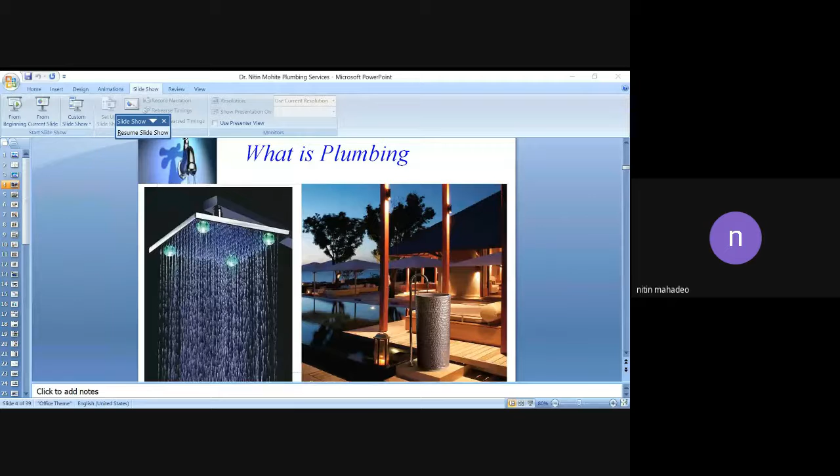Sorry to disturb, slides are not moving. Yes, now it is moving. Can you make it entire screen? If I make it entire screen, once I change the slide, it is not visible to the audience, I think. Is it visible now? Now visible, sir, is it changing the slides? Not now, sir. Sir, it needs to be made into PDF. Is it a Word file? If it is made PDF, it will scroll easily. No sir, it is PPT. I think it is in PPT mode, so if you do it in PDF it will easily move up and down, scroll. Sometimes some laptops do not support that scrolling. Maybe if you can convert it to PDF and once again open it, that will be useful. But now the next slide has come.

I'll keep it this way so that people are able to see the slides, and I can also move my slides, right? Okay, continue. Recently I also visited many hospitals.

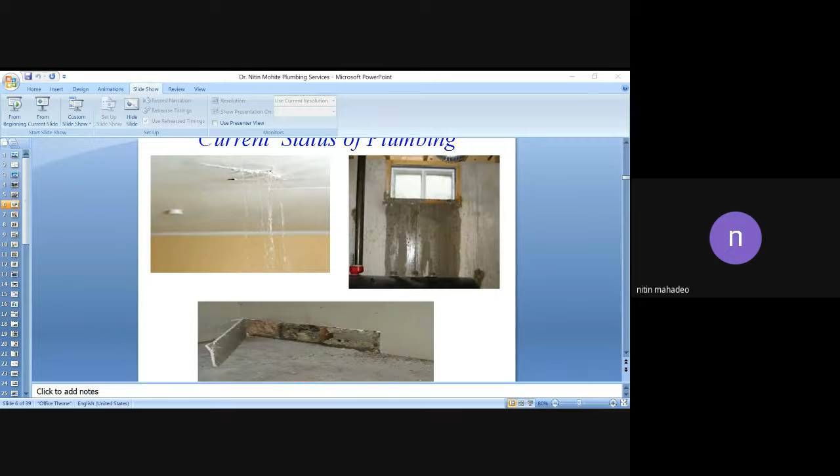But what exactly is the current situation? If you see carefully... is it visible now? Yes sir. So see, in most buildings, water starts leaking from the top floor, whether you are staying on the second floor or third floor, and this is the basic cause of fighting and creating unhealthy situations in most apartments.

Next, if you see carefully, water starts leaking from the air conditioning and the entire wall is wet. If you see the government buildings, if you move to the back side of the building, you have a hanging garden because the wall is wet and the entire green portion is covered. Because of this, where the wall of a bathroom and kitchen is shared, on the bottom side you will see fungus-like situations. Dampness is there, which creates unhealthy, unhygienic situations in the kitchen, directly affecting your health.

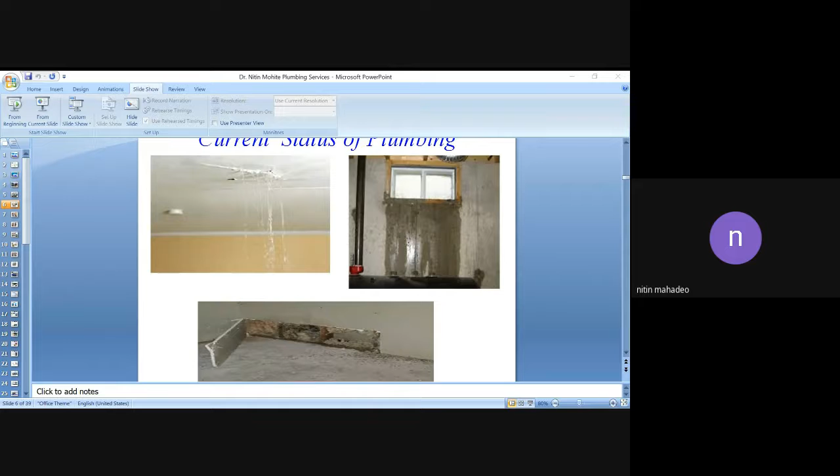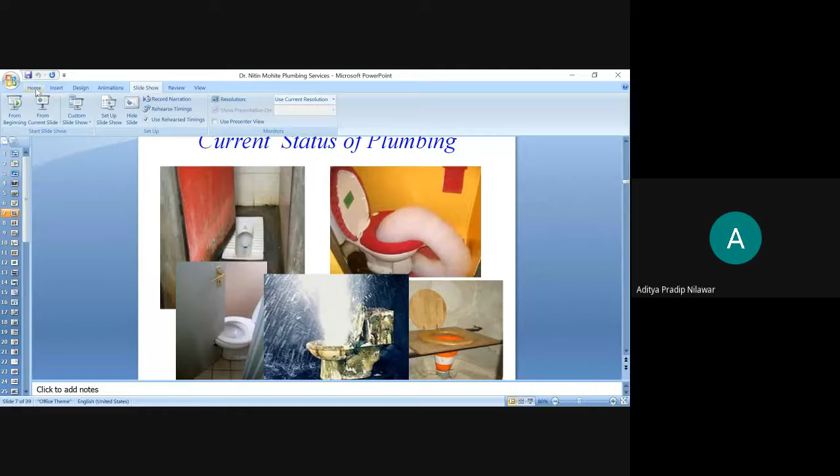Sir, the slide is again not moving. Can you make it a slideshow, sir? Yes sir, that one. Customize slideshow, sir, can you make it? Okay. No, it's not working, sir. Setup slideshow, sir, setup slideshow.

Is it okay now? Sir, it is coming, but after some time it is not moving up and down.

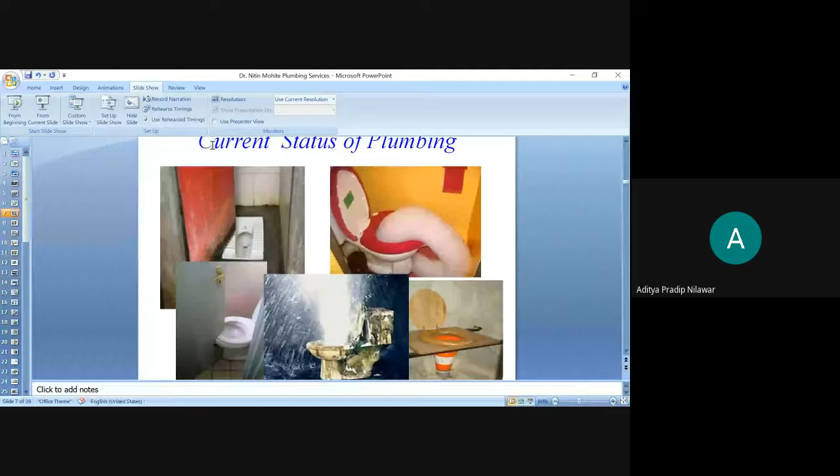Okay sir, meanwhile he can continue. Ask him to send this file by mail to you, and you convert it to PDF. It will take a couple of minutes. Okay sir, send it back. Can you share this slide?

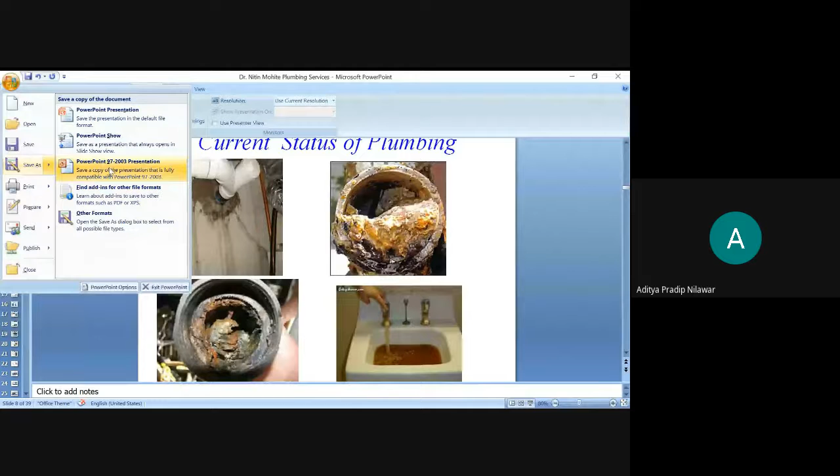If you do this, then go to save as other format, last option, other format.

Or you can print, sir, no problem.

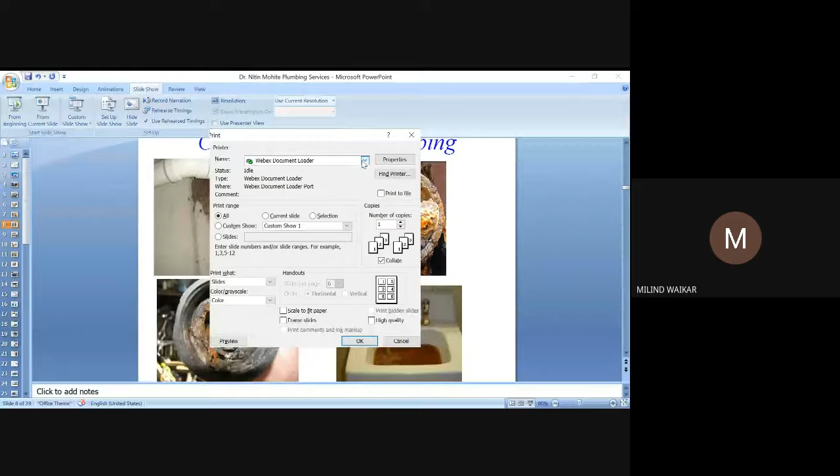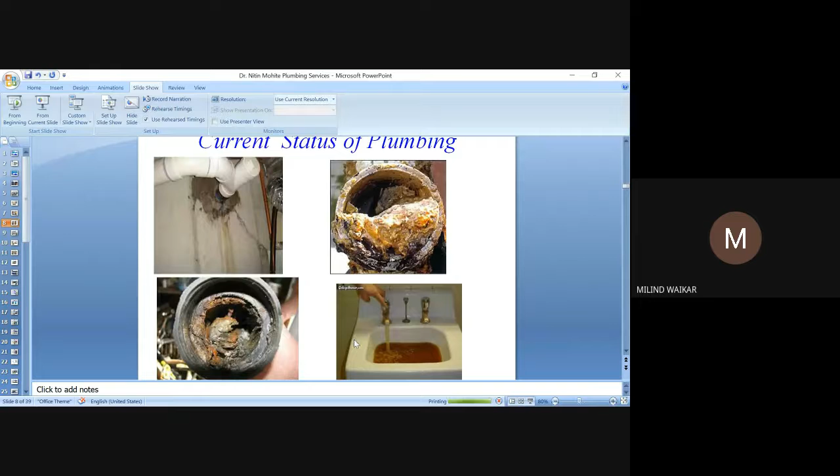Participants, please stand by. Okay, very interesting topic going on.

If anybody is having any other solution, please post it on message so that Aditya can just get track of it.

Sir, what happens once I convert this into a PDF? The slide changing option is not working. No need, sir, the slide changing option just scrolls down the PDF.

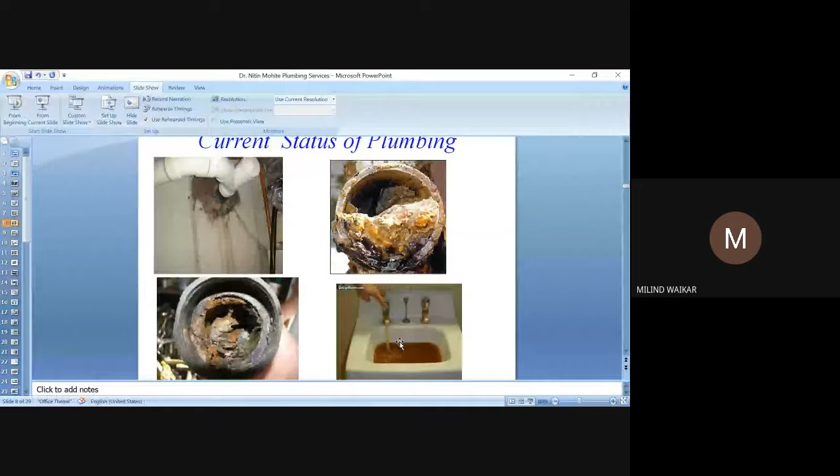It will automatically come down. You open it and it will come down on its own.

Open as PDF. Sir, first you have to stop the presenting, then you have to make it.

If the size is bigger, sometimes it doesn't convert. No, actually sir, in one slide I have an option of animation.

Okay, and videos are also there at that time, so you keep it open, sir.

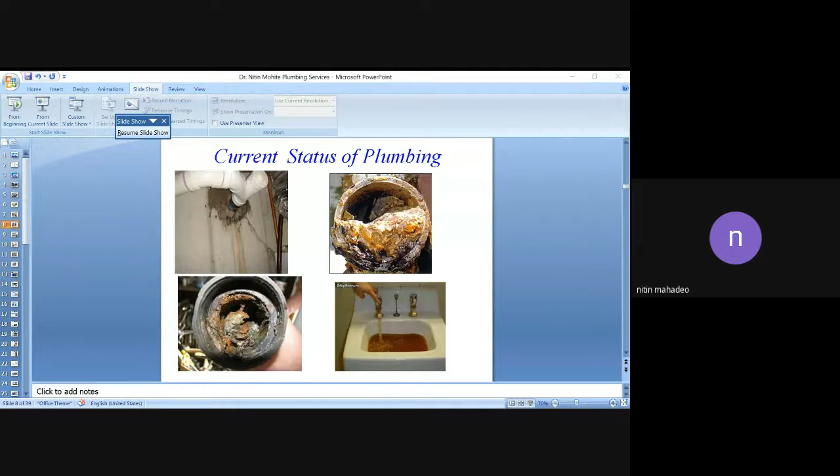Another point is that the water supply pipes which are to be used - generally we use galvanized iron pipes. And see here, more than 50% diameter is reduced. How are you expecting a desired pressure and volume of water coming out from this pipe?

And if you are not having a proper water distribution system with proper pipes, see, Coca-Cola like water is coming from your basin.

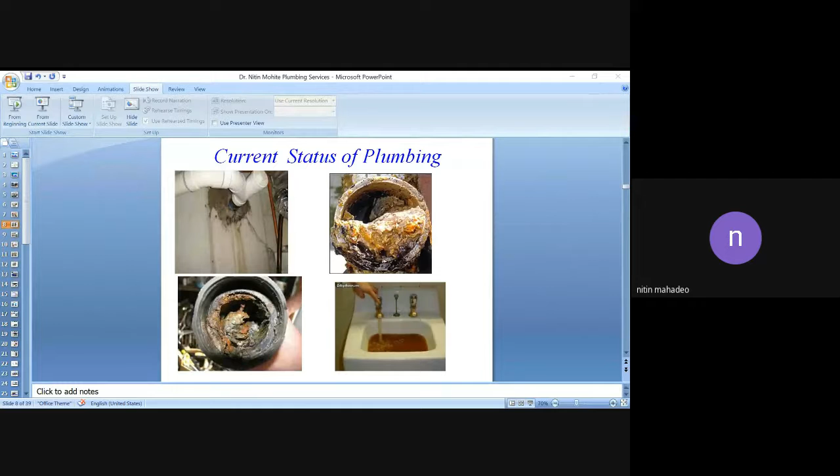That is why it is very, very important to know which type of piping material we are going to use. And if you are not using a proper piping system, the same is coming into your basin.

People are doing adjustments. See how the supports are there for the basin.

Two taps are there, and it is giving support by using some towel or muffler which is supported to this basin. People don't know what kind of technical specifications we need to install, and how the hygienic condition is to be maintained. Urinal is there, closely wash basin is there, having two taps. On the left hand side, there is hot water, and on right hand side, there is cold water system.

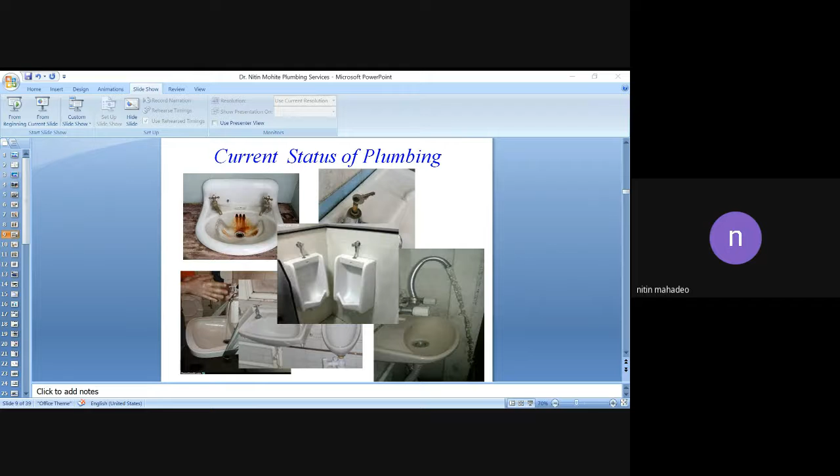This is another issue. See, this is a rented flat. The owner says if there is no faucet available, please go into the market and purchase it, I will reimburse it. The owner is a student, so he goes and purchases a fancy type of wash basin faucet. See the trajectory of water coming out from this, it is nowhere close to the basin.

And that is why in European countries, unless you show an ID card proving you are a certified plumber, you will not get even a single nut or bolt. All plumbing activities are carried out under the supervision of a certified plumber, and later the authority engineer comes and checks all these things. This is the methodology used in European countries.

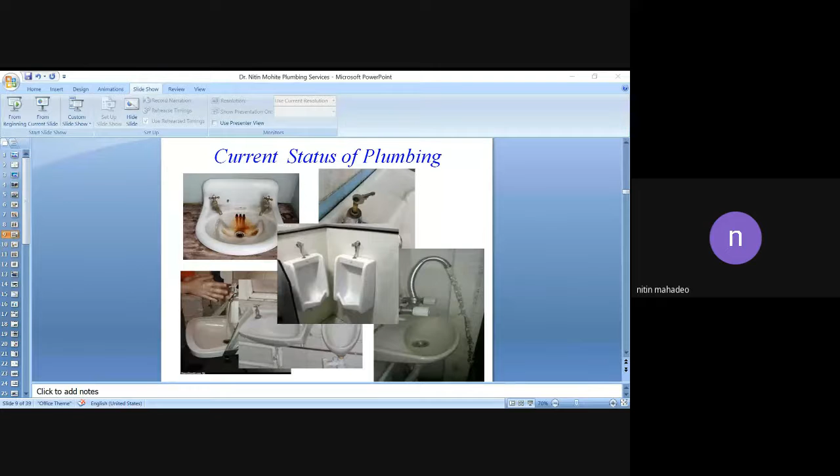Sir, in slides you are not moving, sir. Sir, can we? Is it visible now? Yes, sir. So we have a dual piping system.

Okay, so the water which is coming out from your WC and kitchen is called black water. And the water which is coming out from your basin and bathroom is called gray water.

It is mandatory nowadays for corporations. Within one or two years down the line, they are in discussion with COEP. Have a separate pipe for the gray water. We can treat this gray water and reuse it for flushing. And this first pilot project is already there in the COEP hostel, in association with the Department of Science and Technology.

We have a separate system. We treat this water, reuse it for flushing, reuse it for gardening purposes. And it is mandatory to have a dual piping system.

Solar system is again an issue. We have solar panels on your society's top, but when you wake up early in the morning, say 5 o'clock, if you open the hot water tap, you have to empty 2-3 buckets before the hot water starts coming. So you empty the bucket, and it is a loss of water.

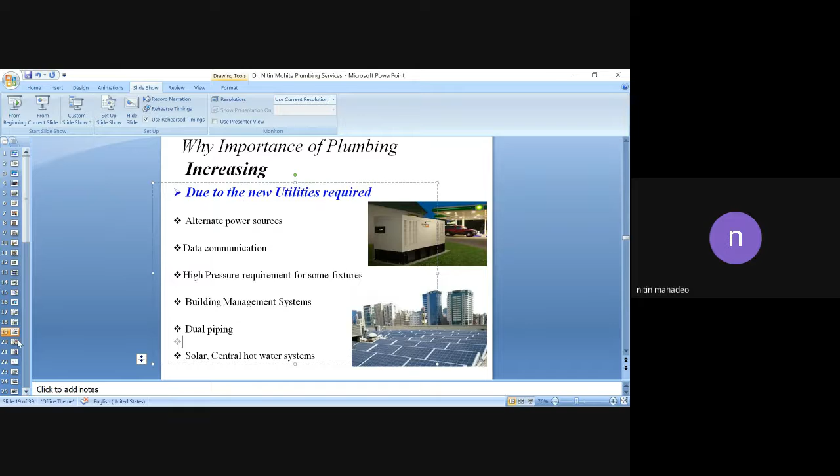Second important thing is the fire systems. It is mandatory to have fire systems.

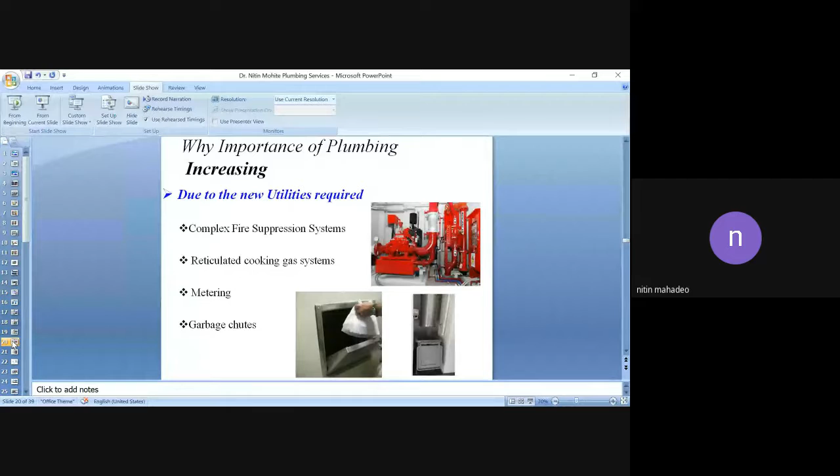So if you use a good system, the health aspect of plumbing plays an important role. If you use a good plumbing system, it ensures good public health. There is saving of water, saving of energy also, and eco-friendly designs are there. How these savings of water and eco-friendly designs work, I'll discuss later on by using technological solutions for high-rise buildings.

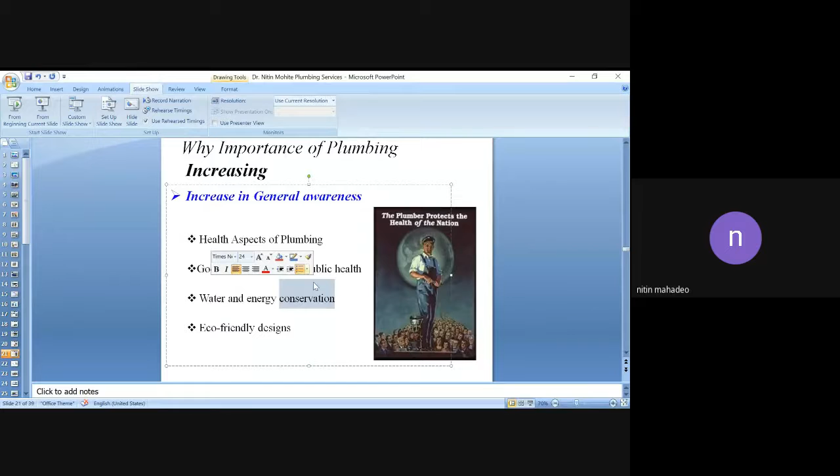Most importantly, the Government of India understands the health-related issues in plumbing. The pandemic spreads through air, and if your drainage system is not proper, foul smell enters into the house. For example, if you are staying in an apartment on the 3rd or 4th floor and go for vacation for 1 week, after 1 week when you open your door, you see bad smell accumulated into your entire flat. Immediately you open the windows and switch on the fan. This is very dangerous. Foul smell enters your house through the floor trap and through wash basins, if proper traps are not provided.

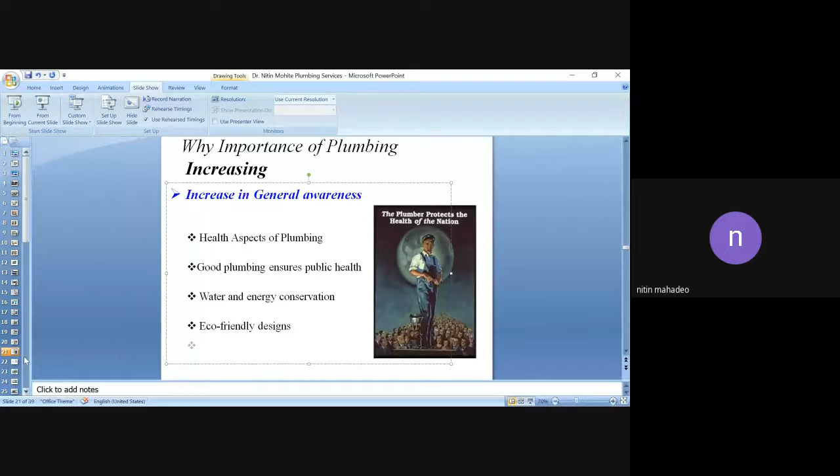That is why the Government of India started the Skill India mission. The National Skill Development Corporation was started, where the Indian Plumbing Skill Council gives certification to all these plumbers. Generally at our construction sites, on day one an unknown fellow enters the site and starts cutting pipes and other activities. After 1 week, he becomes a 'plumber,' and you don't know the technicalities involved in the plumbing system.

So plumbing is a profession that protects health, safety from fire, safety from foul gas, and provides comfort to all the people staying in the building.

Comfort means a desired pressure of water coming out from the basin. If you see carefully in the hotel industry, in the month of May, when you wash your hands, they intentionally reduce the tap flow below the basin so that less water comes out. So you are forced to touch the wall of the basin, which is unhygienic.

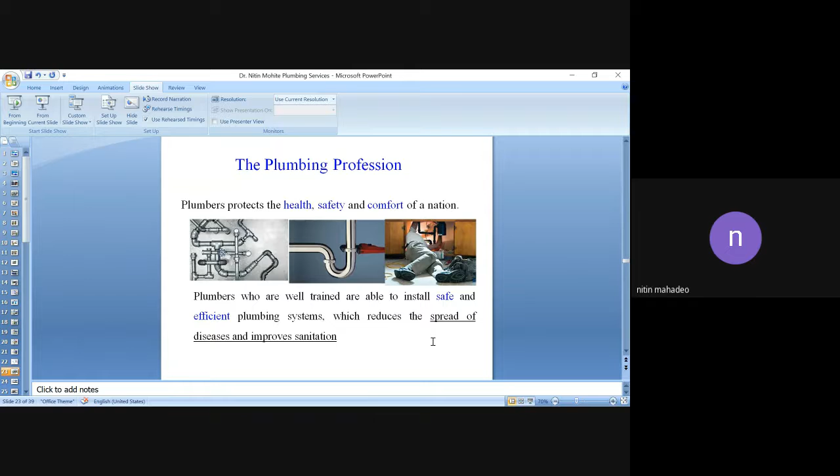Instead of that, if you provide proper fixtures to the tap, water saving is achieved. A plumber is trained to install all plumbing fixtures safely and efficiently, so that the spreading of diseases through water and air is restricted. It is a noble profession which protects the health, safety, and comfort of the nation by supplying a reliable plumbing system.

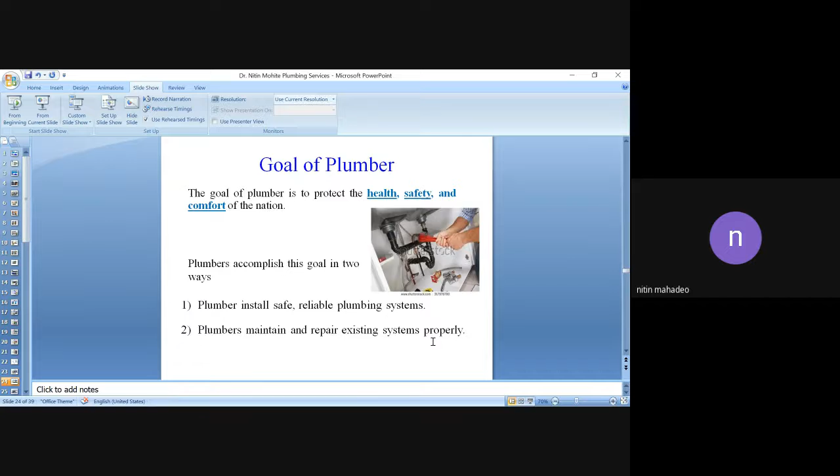Not only supplying, we have a tendency that once it is installed, we never think of its maintenance. We need to carry out the maintenance of these things. Is it a new technology? No, not at all. It started during old ages, where pipes made up of trees were used, and a hole is created.

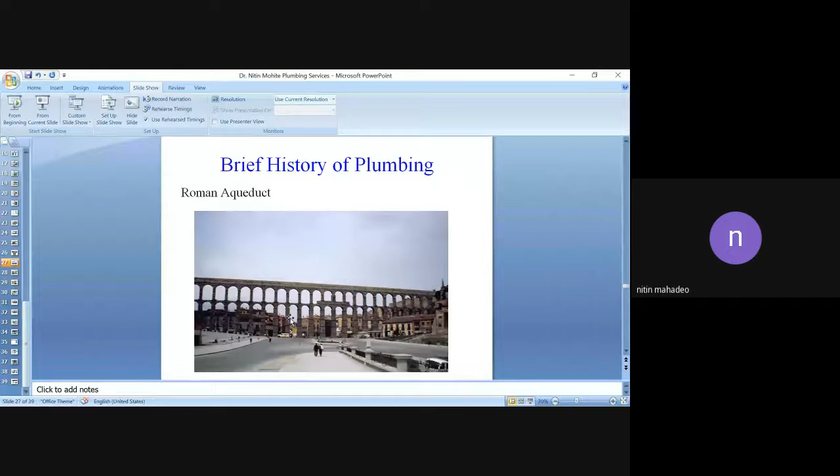In India we have temperature that varies. Generally, if you ignore the north part, the temperature is between 10 to 41 degrees centigrade, so we need to take a bath. But what about European countries? Because of temperature which is in the minus, they take a bath once in a week. That's why they use deodorant and other things, and why they wear coats, because the heat should not be transferred outside from the body. In India we have to take a bath daily.

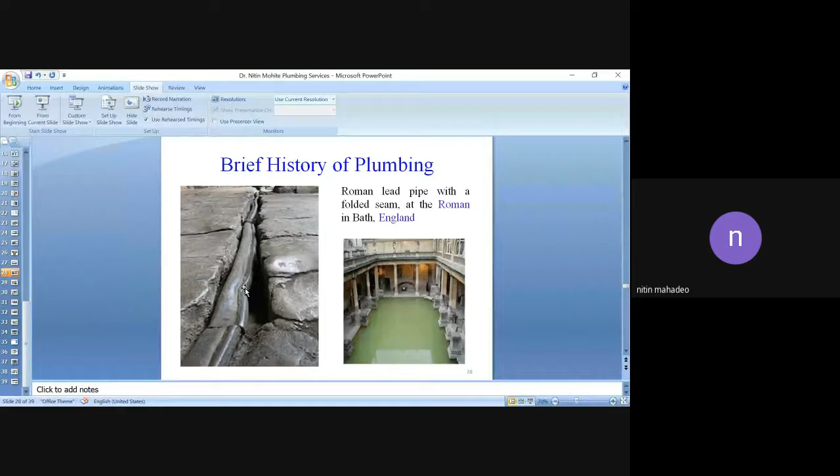In this left hand side photograph, you see lead pipes being used. In Roman times, lead pipe means 'plumb', plumbum, that is why plumb means lead pipe, used to transfer water. You already know the Harappa Sanskriti, where good water management was observed.

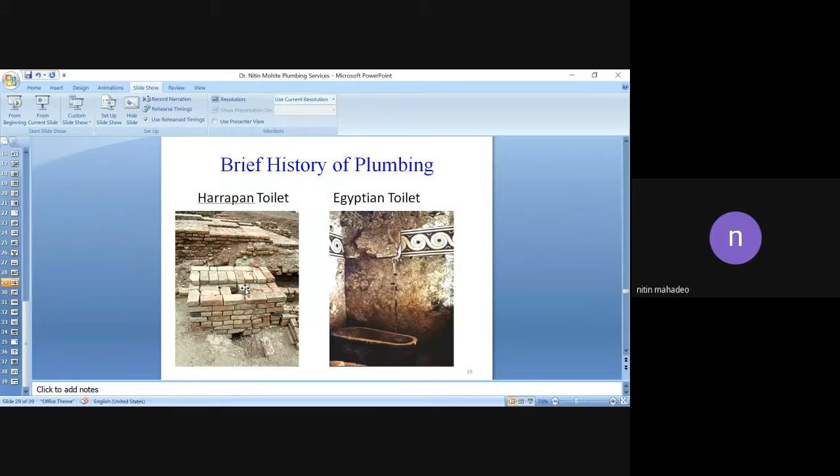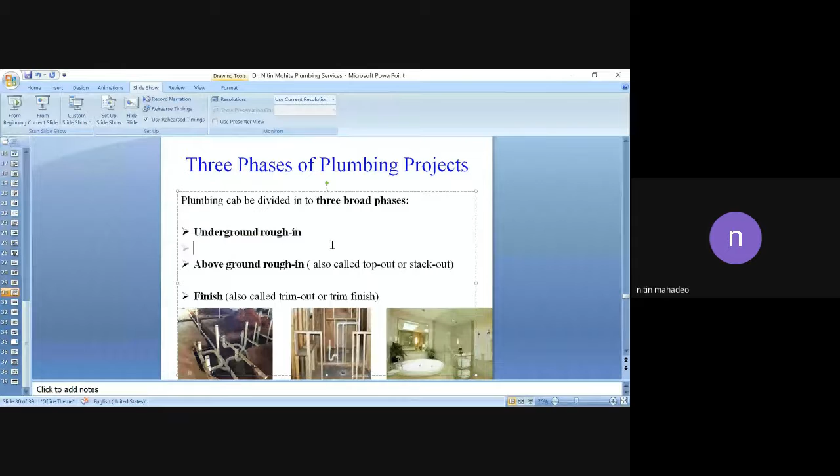If you carry out any civil engineering activity, there are three important phases of plumbing projects: underground, above ground, and finishing. In Europe, the first step is to check the underground rough-in. Once the underground piping is carried out, it is sealed, and a smoke test is carried out to check whether any leakage is there.

Once that is carried out, the green signal is given to carry out the plumbing above the ground. Here in India, we never think of this, and because of this, water starts leaking from drainage pipes, goes into the foundation, and a lot of issues come up, and we never think to repair it again. That is why underground rough-in is a basic fundamental and important step to check the leakages in the pipe.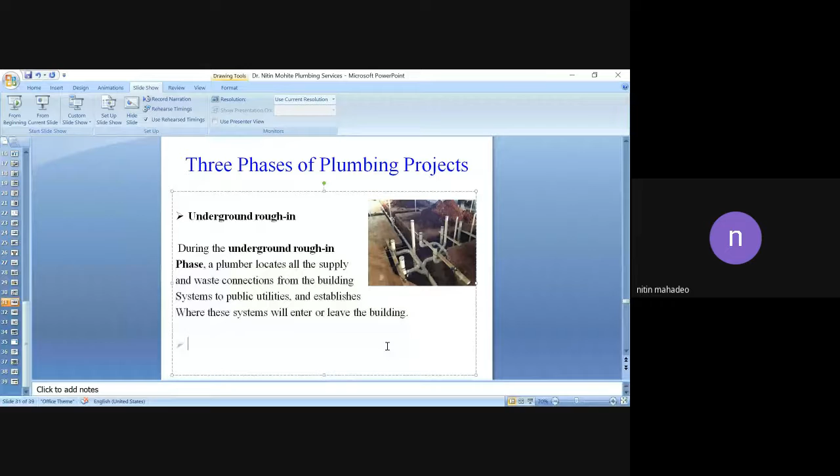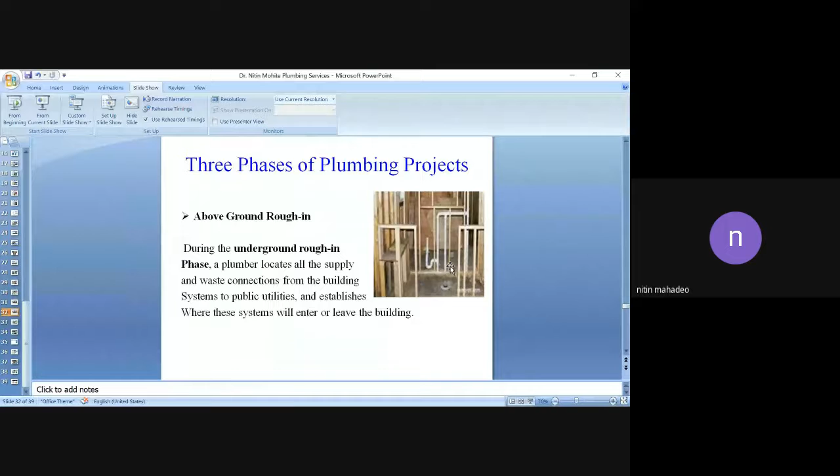The second step is above ground, where all the piping and water supply pipes are checked, and a pressure test is carried out. If no leakage is there, then you move to finishing. Once the finishing is over, if any issues are there, you have to break the tiles, and you will not get the same tile again.

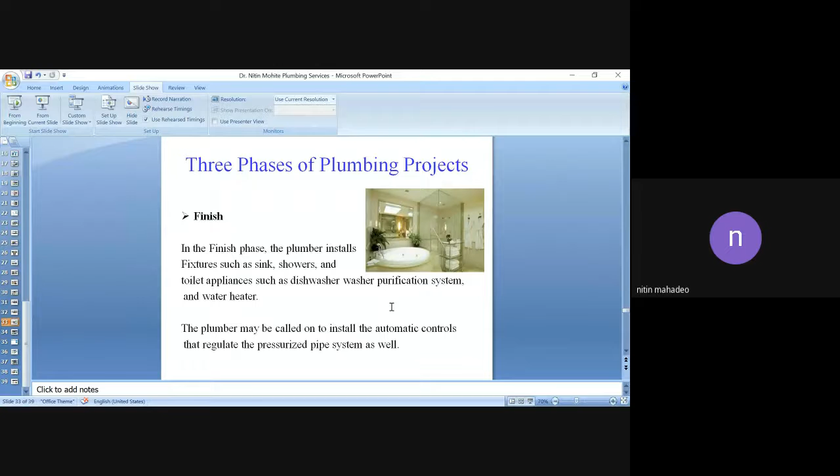Once the finishing work is done, any leakage from the water supply pipe creates a lot of issues. That is why you create proper maintenance for your system, right from pumping to drainage to water supply, to your simple taps, bathrooms and basins.

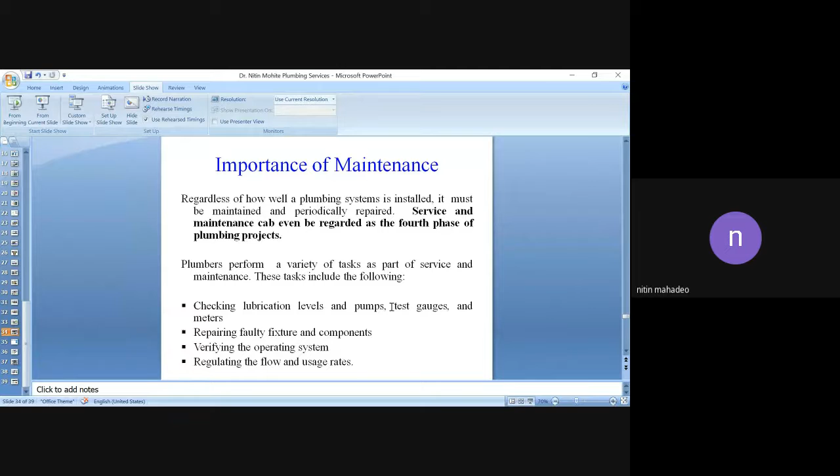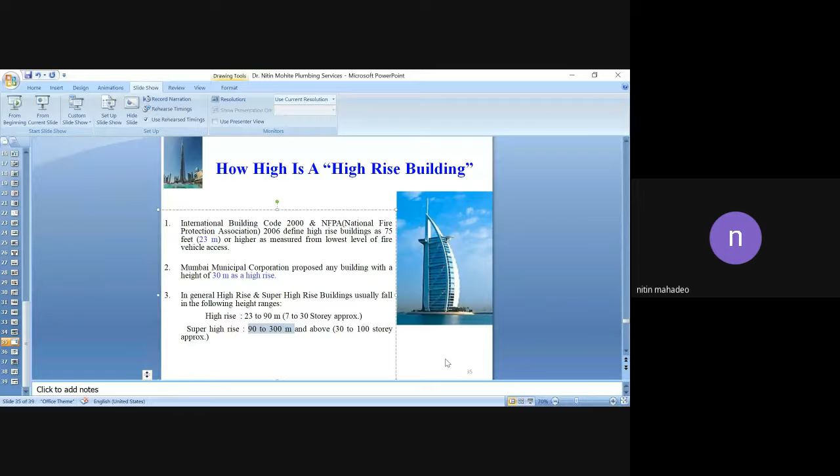People love to stay in high rise buildings because of the comfort level and because of the safety level. So proper design of the systems is needed here.

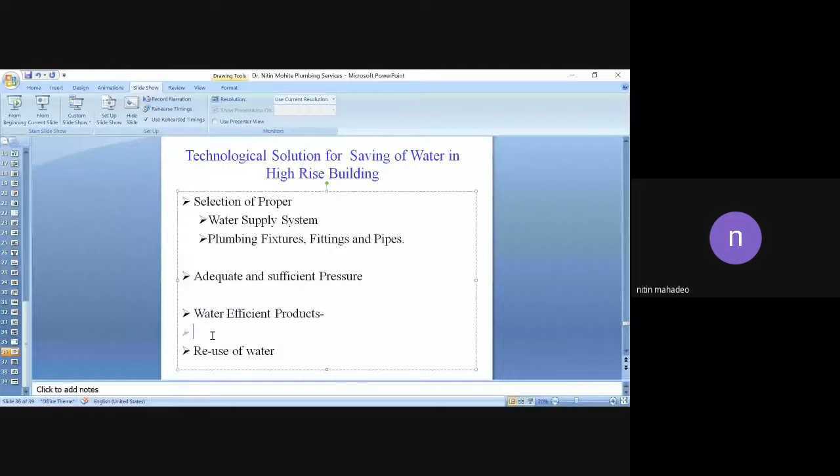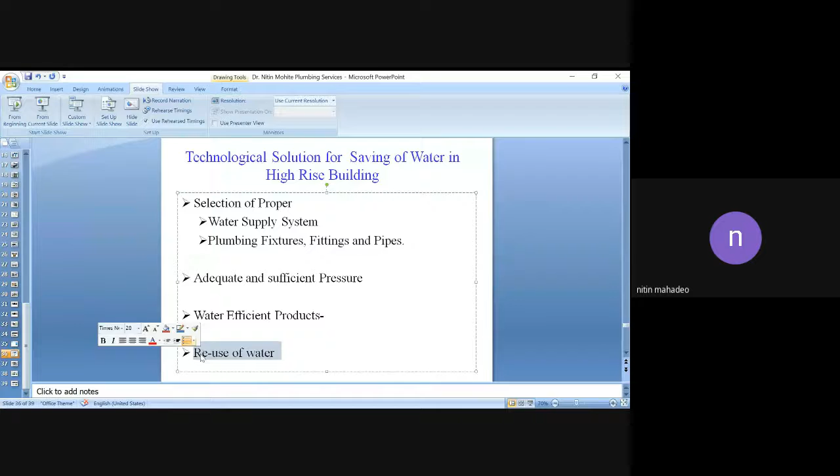So how are we going to move to technological solutions for water saving? You have to select proper water supply system, select the plumbing system and its fittings where you need adequate and sufficient pressure. For that you need water efficient products which save water, or you may treat and reuse water for flushing.

Depending upon the corporation, there are various requirements of water. The water requirement based on population varies from 70 to 100 liters. If the population is increased, it changes from 100 to 135 liters. And for high-end communities, consumption changes to 150 to 200 liters per day per person.

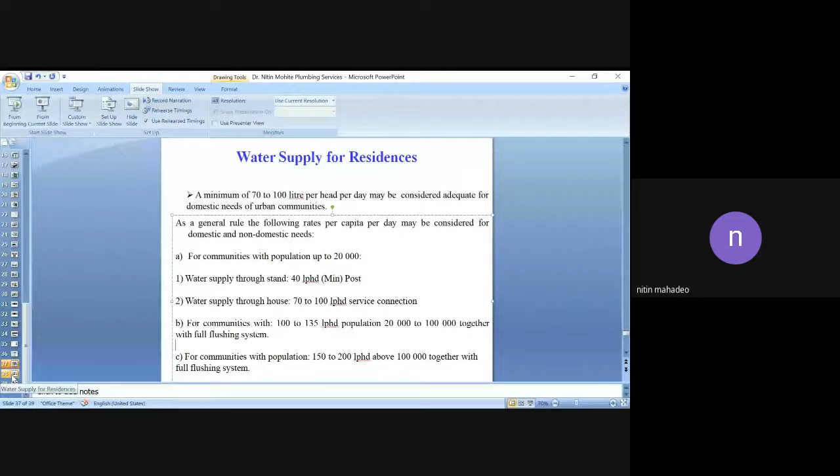These are the norms laid down by the municipal corporations or CPHEEO manual, or the recently introduced Uniform Illustrated Plumbing Code in India. You have to look into these norms and calculate the water requirement accordingly. These are the general requirements.

How much water is required for flushing? For flushing, you need 6 liters per flush. Earlier, in few houses or old buildings, 10 liters per flush was used. So if you use a urinal, 10 liters of water is flushed out - this is a wastage of water.

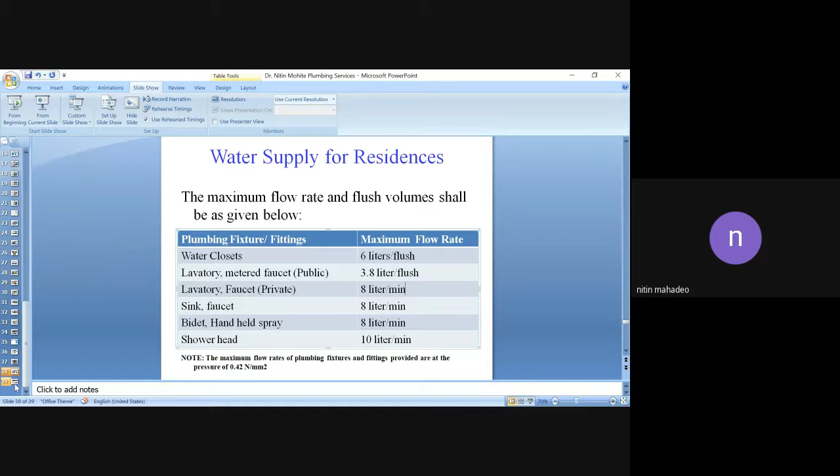As far as bath is concerned, bucket bath is 15 to 25 liters, while shower is 40 to 50 liters. And if a student takes a bath in a shower, he spends half an hour because it is Sunday - until someone knocks from outside saying 'bahar aa jao', he'll keep bathing because desired temperature keeps coming from the shower panel. So bucket has minimum consumption of water, and as you go down the line, usage of water increases.

Now what are the technological solutions here? Either you change your habits or you use recent techniques for water saving, like rainwater harvesting or reuse of water systems.

But what about buildings which already exist? What are the solutions for that? So Indian Plumbing Association, in association with College of Engineering Pune, used a technological solution in the hostel campus by installing pressure compensating aerators. I'll show the video as well as how these pressure compensating aerators look and where you fit them.

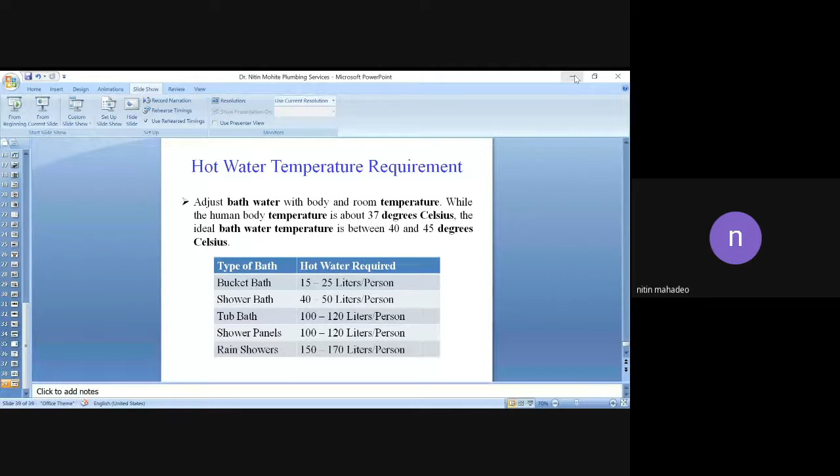Is the slide visible? Yes, sir. Visible, sir. Yes.

So we had a thought - how can we save water? We started a mission, the I Save Water mission, where we looked at how we can save water in public places, in the public domain, so that water saving is carried out.

We carried out this study between 2016 and 2018 in association with Indian Plumbing Association, where we saved 5 crore liters of water every year.

I have a few videos also related to this. Let me share a video related to the water.

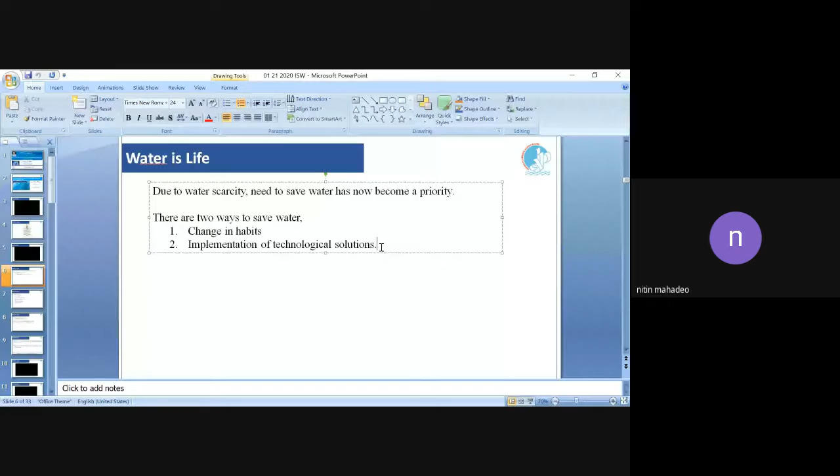To save water, there are two ways we can do it. You can change habits, telling somebody to use less water, but a lot of issues come up and it takes time. The second option is technological solutions. These are the two ways to achieve water saving. But as far as habits are concerned, it takes a lot of time, it's a long process, and it's very difficult to convince somebody to save water by changing their habits. At the end of the day, you are not going to achieve your water saving target in a desirable time period.

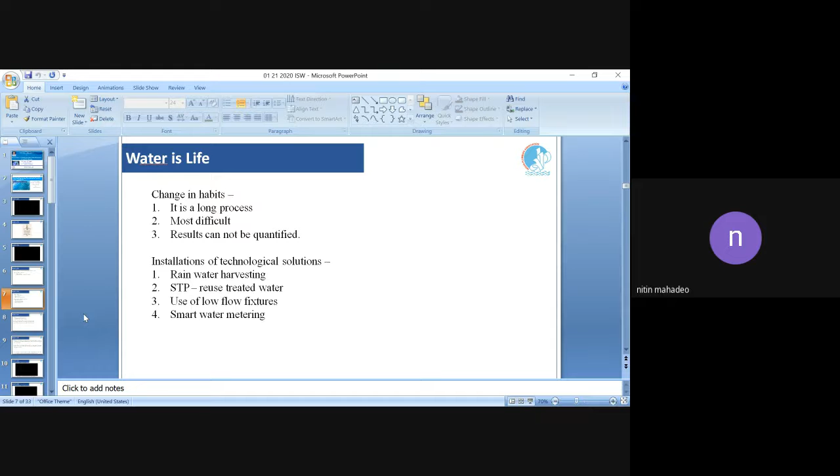As for technological solutions, you can see four solutions coming into the picture: rainwater harvesting, smart water metering, and STP. These are the norms coming into the picture as green building concepts or environmental clearance requirements. So rainwater harvesting and STP technologies are to be used for new buildings, because without these, the corporation or environmental clearance team will not issue a clearance certificate. That's why this is widely implemented for new projects under the sanction process. They are mandatory to have a rainwater harvesting system, a smart metering system, or treatment plants to reuse water.

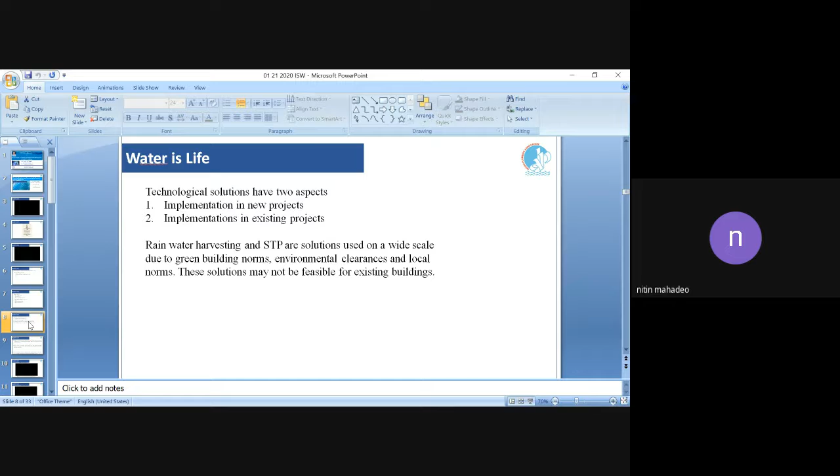IPA and COEP came together and decided on a third solution: the use of low flow fixtures. This can be used for existing buildings, existing societies, commercial complexes, hostels, etc. As this is used for existing buildings, it is one of the most scientific ways we can save water, by installing PCA.

What do you mean by PCA? It is a pressure compensating aerator. Another one, PCW, means pressure compensating washer. It works by simply changing the orifice diameter. When pressure changes in the tap, it releases the desired amount of water. In the pressure compensating aerator, there is a rubber washer which is flexible. Depending upon the pressure, it will expand and contract, and the desired water is supplied to the user through the faucet or basin tap. So these are the solutions we are ready to provide.

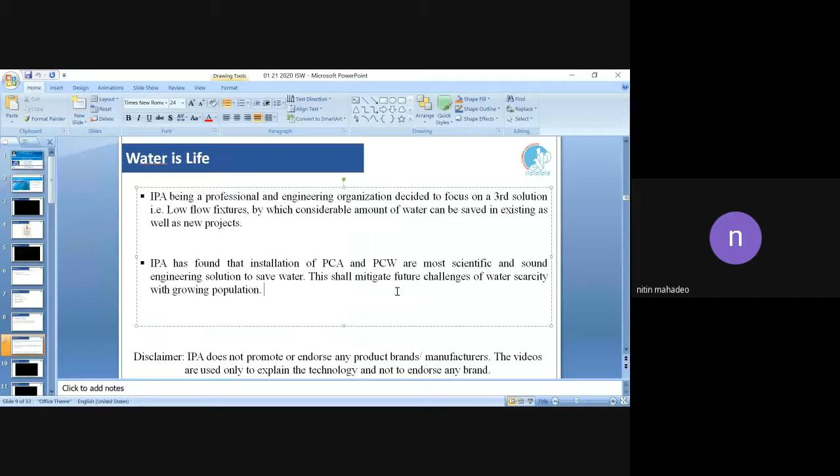Now how does it work? I'll show one video where the pressure compensating aerator technology used for the faucet is demonstrated. Audio is not there in this video, just look at how the technology works here.

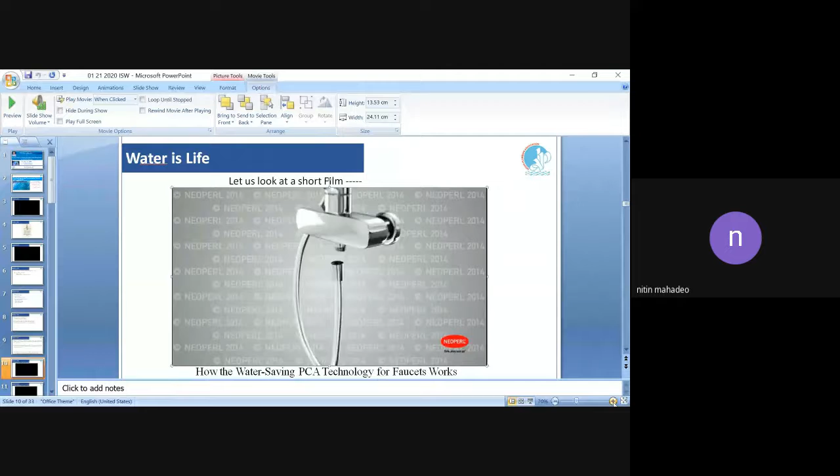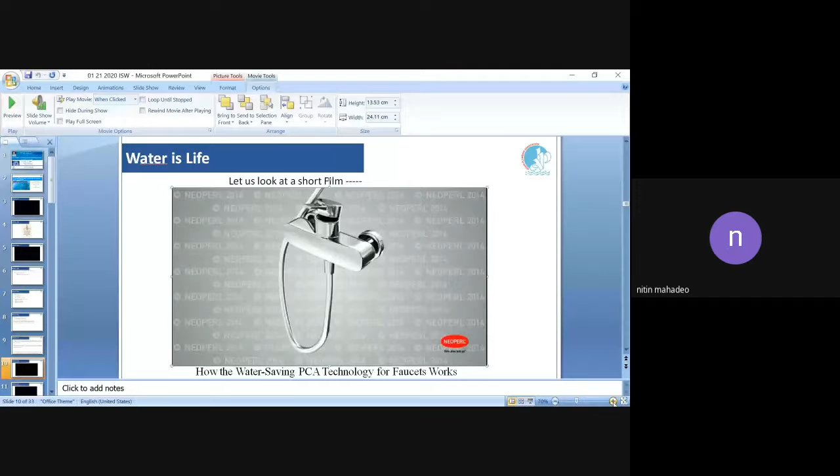See, this is the pressure compensating aerator. If you see, the pressure changes but the flow rate is constant because of expansion of the rubber gasket which is there, which is to be facing for this particular faucet. Though the amount of water coming is less, the desired release of water from this faucet is constant.

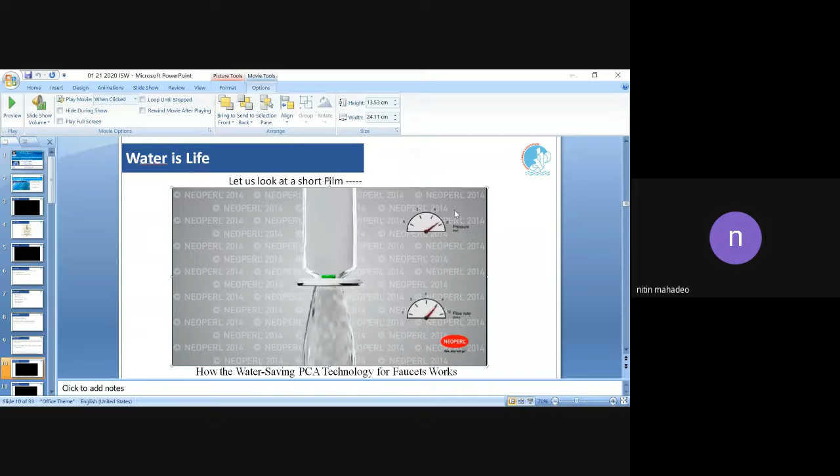Flow rate is constant, if you see, on the right hand side. If the pressure changes... so these products are available in the market.

Now another one is for the showers. So you can fit it here. The diameters vary, right from 11 to 16 bore, it is available. You can use and fit it.

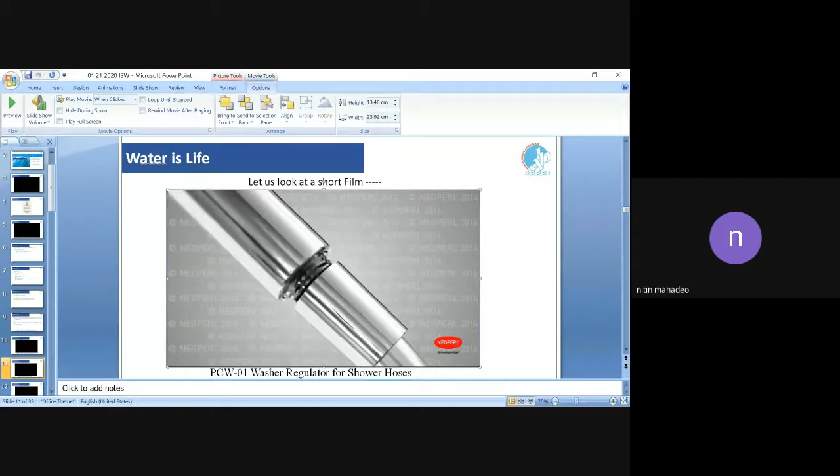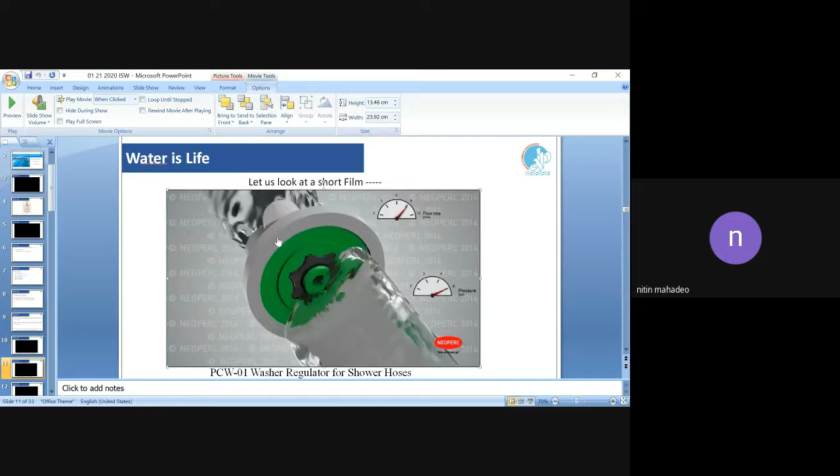So though variation in the pressure is there, the flow rate is constant. So two aspects, technological solutions are there: the aerator, which we call the flow restrictor, and the pressure compensating aerator. So we carried out the investigation. It is observed that pressure compensating aerators will give a desired satisfaction level in spite of frequent variation in the pressure.

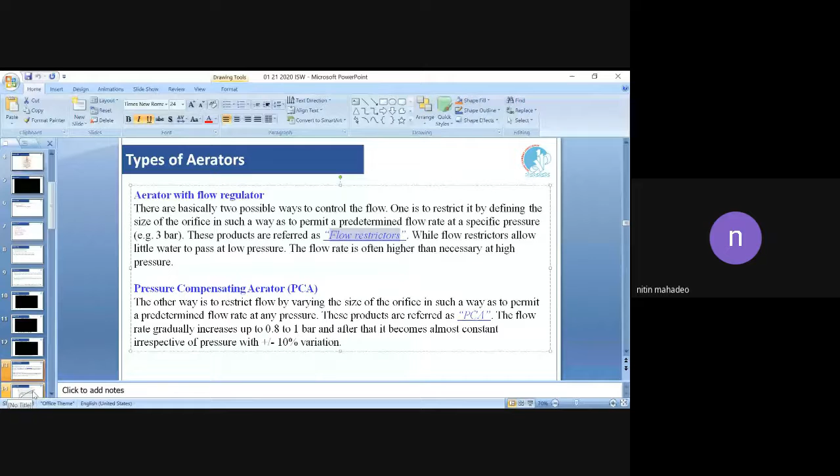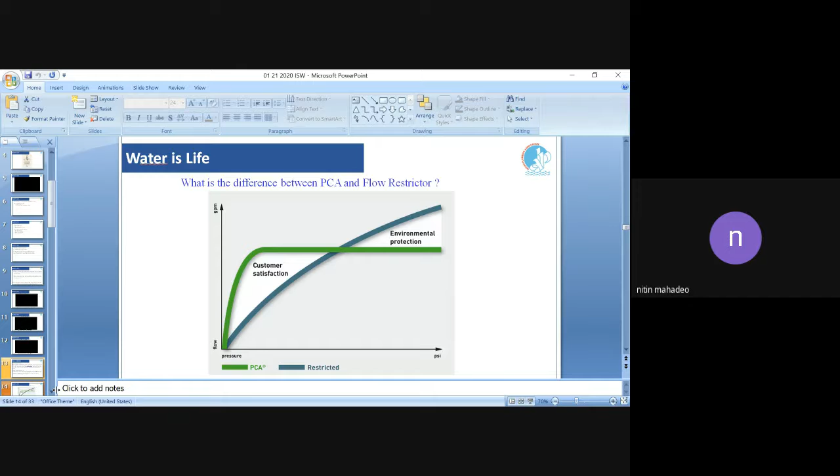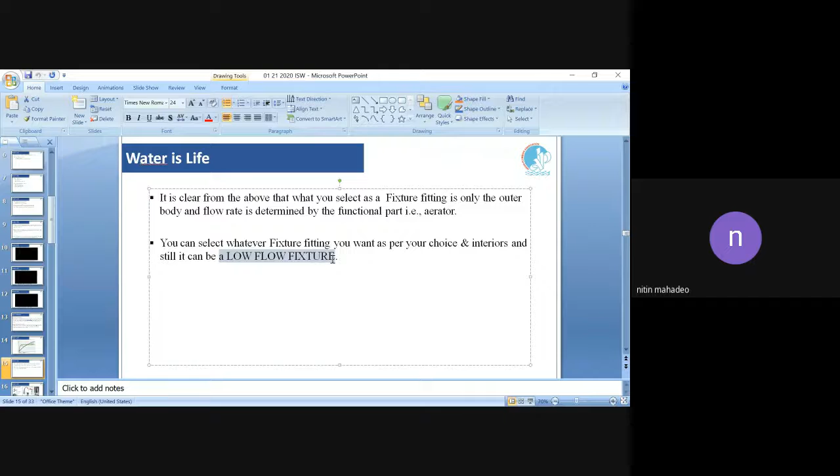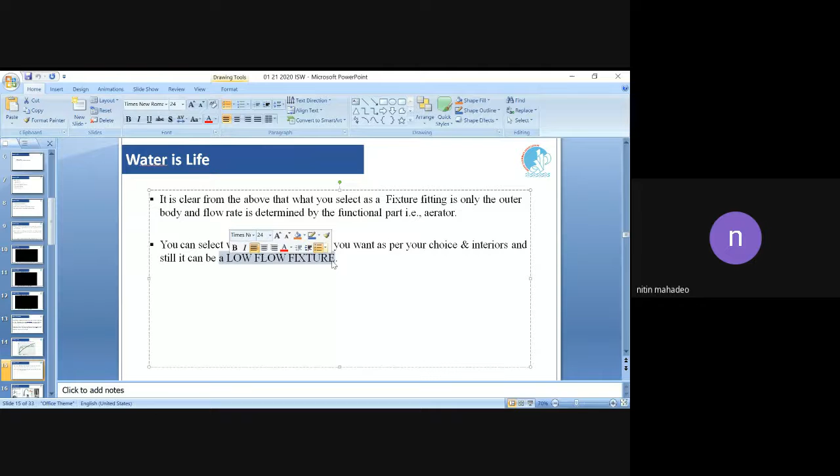That is why we selected the low flow fixture, or the pressure compensating aerator, to install at various places in Pune to achieve a saving of water of 5 crore liters. So we fixed this low flow fixture unit at various places. I'll come to the case study area at the end of this presentation, where we carried out the case study in Pune particularly, and all over India.

Another solution is that you have to use a pressmatic auto closing faucet. It is to be used for the basin, where you have the pressure compensating aerator and this pressmatic auto closing faucet. This is widely used at public places because we don't have a 24/7 water supply system, it's intermittent. If somebody opens the tap and no water is there, he is not taking that much pain to close the tap. That is why this pressmatic auto closing faucet is to be used.

So these are the ways to install the technological solution to all these kinds of fixtures. Or you may use the pressure compensating aerator, which we already showed you, for the showers, for the basins, etc.

Or in Singapore, a new concept is there: you have a low flow fixture unit urinal where a sensor is there. Once you come in front of this sensor, it flushes the desired discharge of water, and once you move away from it, the water automatically closes.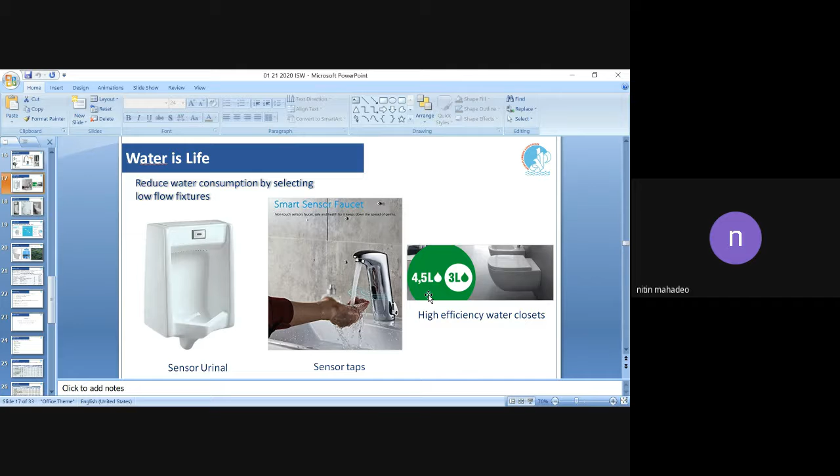Now in high-end offices or in apartments, they have a concept. See, the urinal is there, above this the wash basin is there. So if you carry out your activities and wash your hands, that water is stored into this compartment. It is entirely made of ceramic material, and that water is used for the flushing.

Similarly, this is a WC. You can see above this, the basin is there. You can wash your hands after carrying out the activity, and that water is used for flushing. So 3 liters of water is used for the flushing. These are the water efficient products which are available in India: wall hung WC, floor mounted WC.

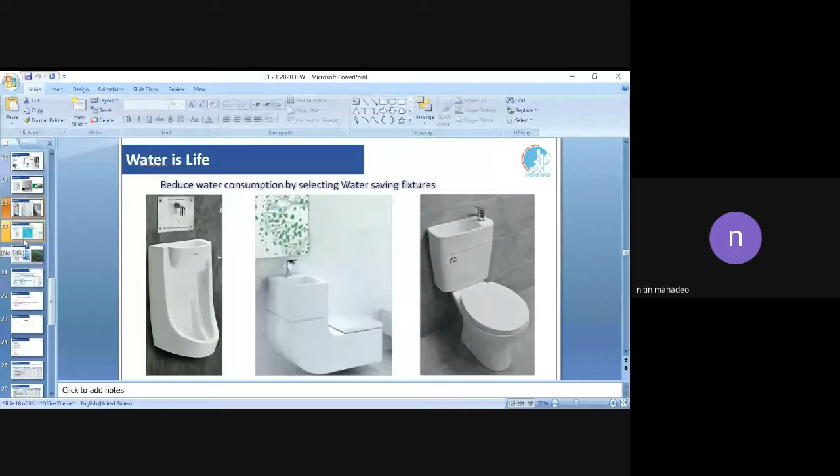Or you have shower panels which reduce the water consumption, and recent technology allows you to control the temperature and pressure using a mobile app which is available. This is how the technologies are to be used in existing buildings, and it is most recommended for proposed buildings as far as water saving is concerned.

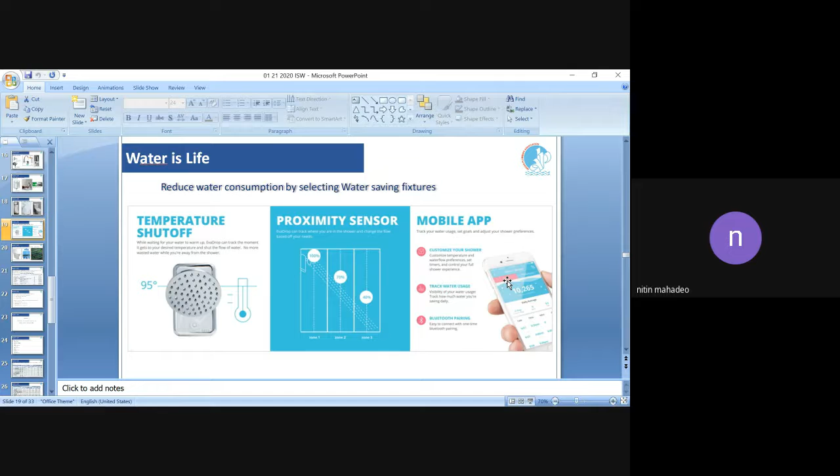Or you may have treated water, the water which is coming out from the bathroom or wash basin, which we call gray water. What does it contain? It contains shampoo, soap, etc.

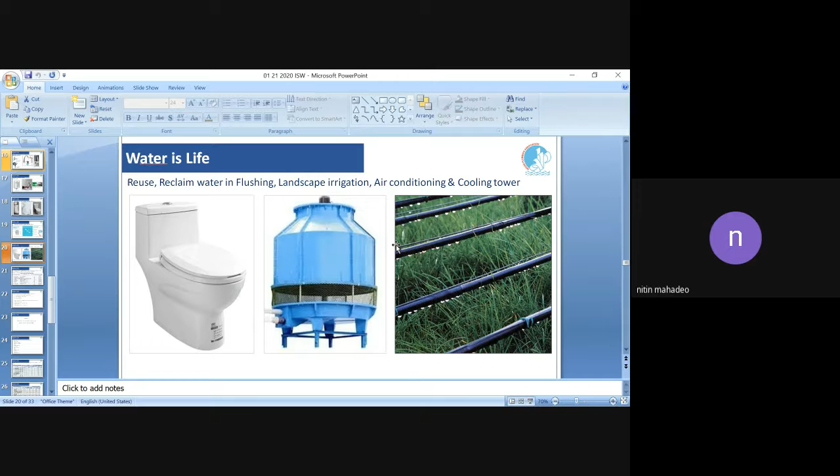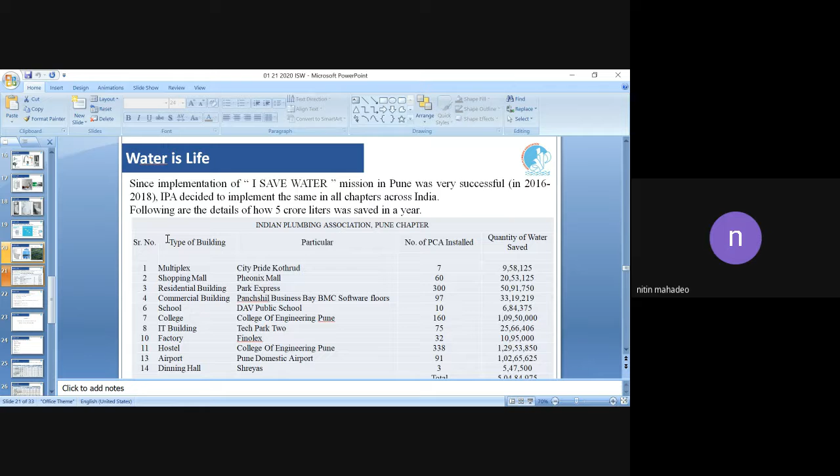So if you give the treatment and reuse it for flushing purposes, landscaping, and even for cooling towers, you can save water. Under the I Save Water mission in 2016, we set a target to save 5 crore liters of water. We selected various buildings in Pune, ranging from public to private, hostel, and educational buildings.

Initially we started with the College of Engineering hostel campus, where we installed pressure compensating aerators in 338 basins in the hostel campus. There is a new building, the girls hostel, which is like removing the hostel tag entirely - it's a 5-star hotel with attached toilets for the girls, using latest technologies for hot and cold water. We saved more than 1 crore liters of water there.

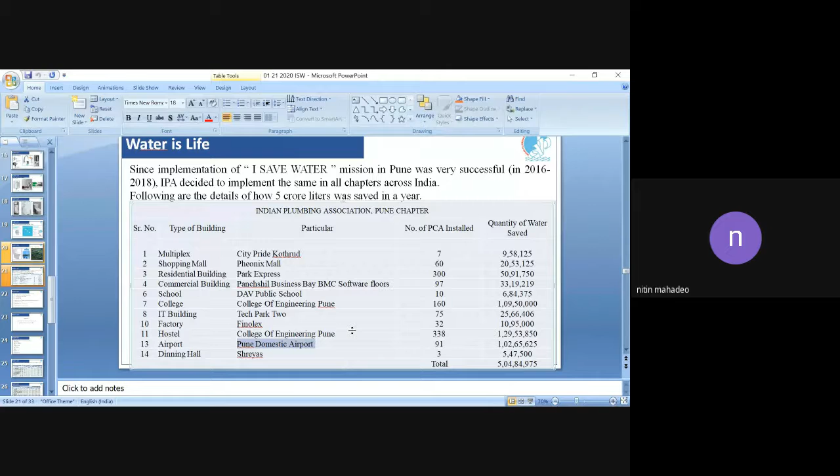Similarly, we installed this aerator at the multiplex City Pride Kothrud. Then we installed it at Pune Airport, Pune Railway Station, and an IT building in Pune, and we have had a satisfactory response from all of this.

So this is the pressure compensating aerator. It is cost effective - the cost is not more than 150 rupees per fitting. It is very easy to install; you can see my first video for the installation process, and we can use it for new projects also.

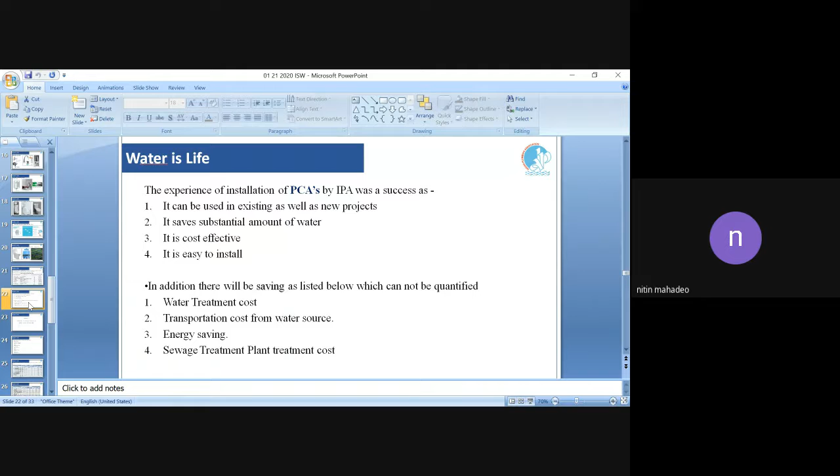Here the saving of water is achieved. Once you use less water, the treatment cost is less, transportation cost is less, and we save energy also. We saved more water, up to 500 crore liters, through continuous observation of these fittings at all the places. We saved 500 crore liters of water by 2020 through installation of pressure compensating aerators and washers.

So broadly we selected buildings ranging from schools, colleges, shopping malls, IT buildings, hotels, to hostels and railway stations. Once this was successful, we went into more detail, referencing the National Building Code.

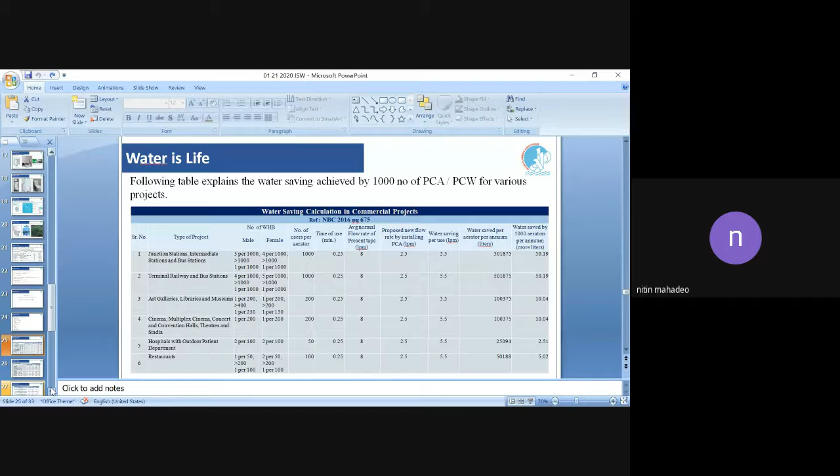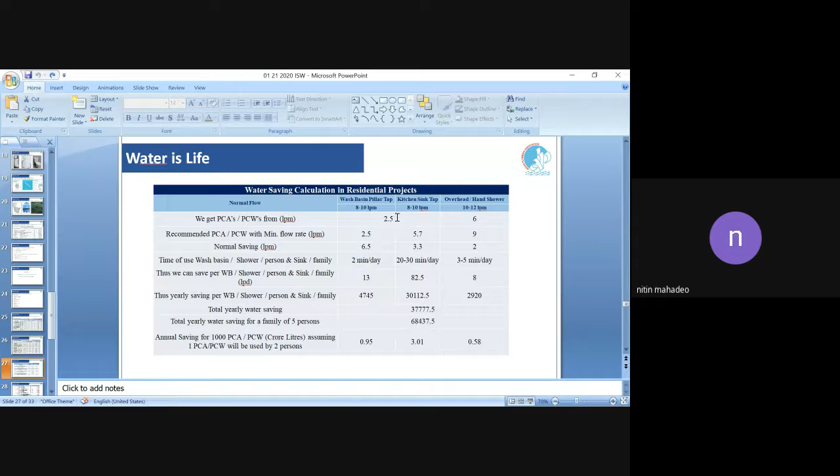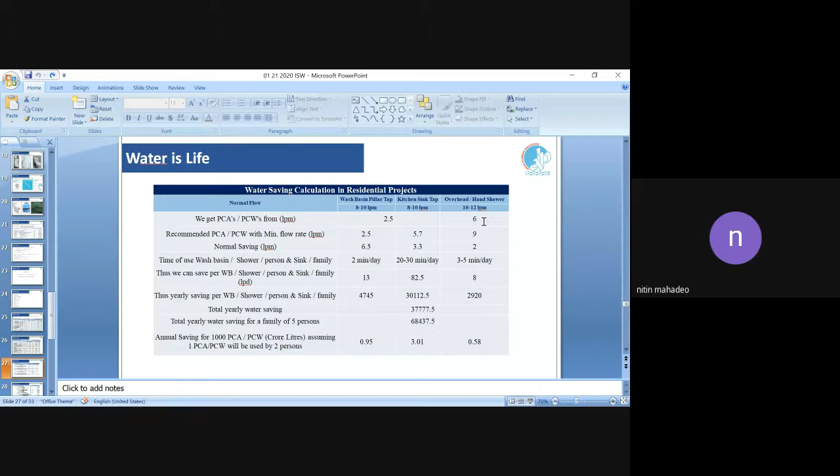We took this mission to the national level, and each chapter of the plumbing association started implementing it - beginning in Pune. The Pune plumbing association chapter saved more than 5 crore liters of water. Then the Ahmedabad and Chennai chapters also installed these aerated fittings at their respective locations, carrying out water savings under the I Save Water mission.

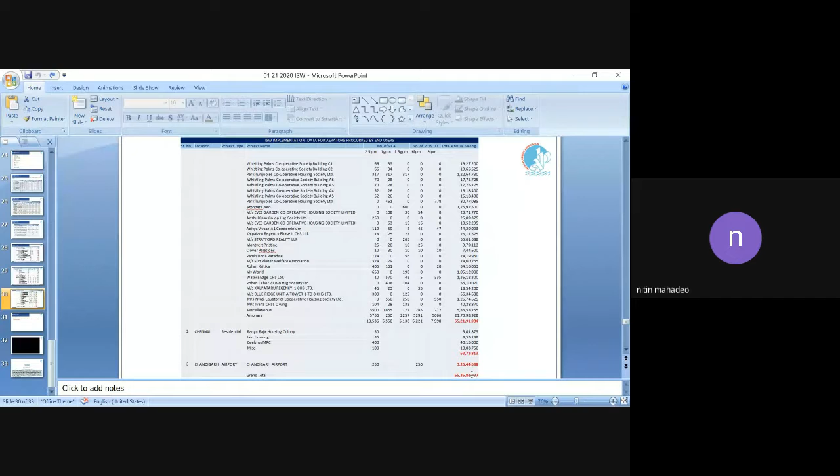These are the cities where installation was carried out, and not only installed - they monitor every month the functioning of the aerators. This is the success of the Indian Plumbing Association and all the stakeholders implementing and using this technology for saving water.

I have one more video for you.